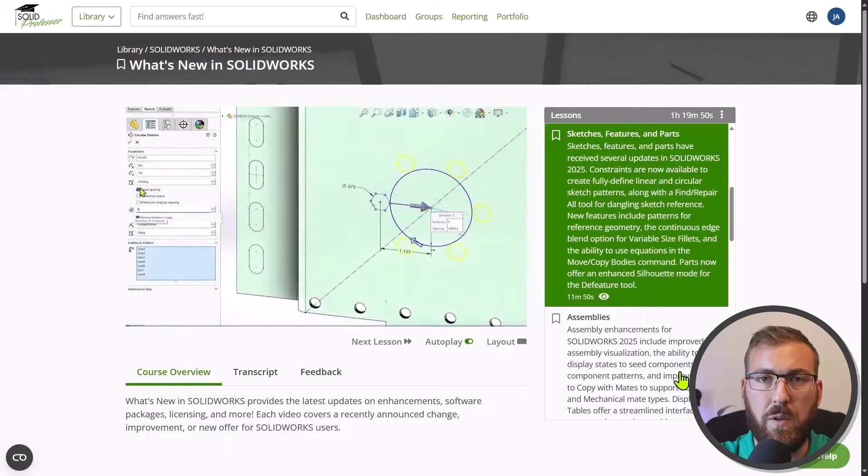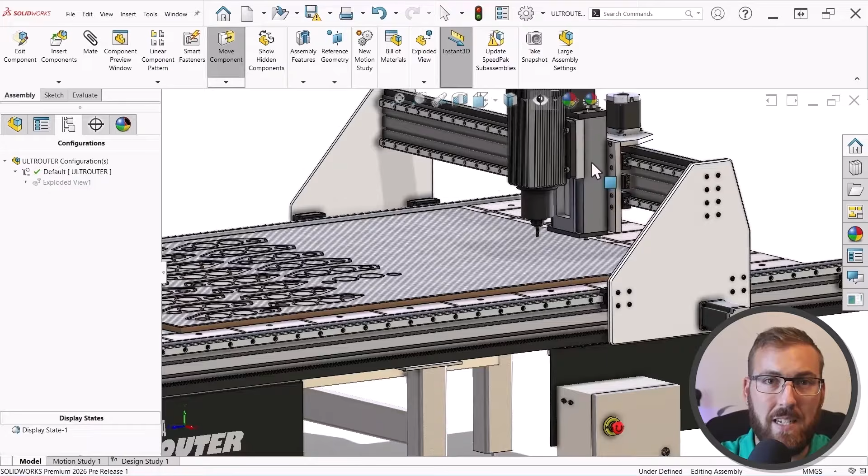Lastly, I'd like to offer a quick shout out to my friend and colleague Ryan Navarro, who designed the router assembly we'll be using to show off these capabilities. It's got over 400 components, a fully articulating gantry and spindle, and some pretty impressive details. Alright, with that out of the way, let's take a look at number 1 on the list.

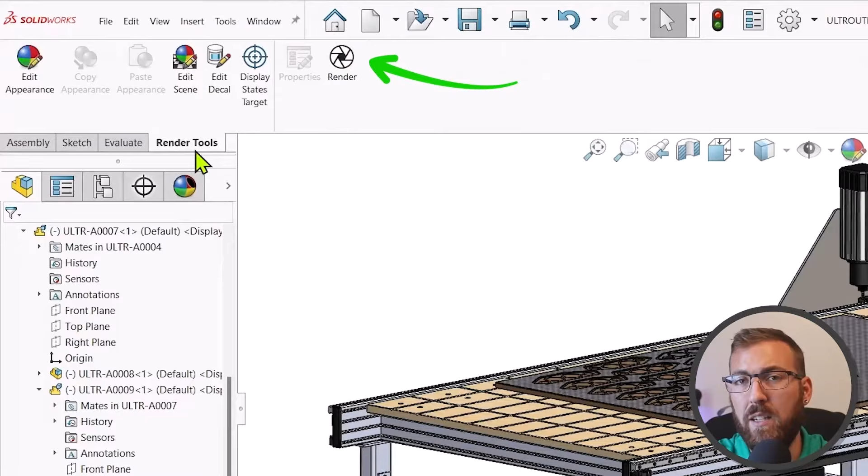PhotoView 360 was retired back in 2024, but SolidWorks 2026 now offers a somewhat similar replacement. If you have Visualize installed and licensed, you can enable the add-in, go to the Render Tools tab, and click Render to create a photorealistic image directly from the graphics area. Set file name, format, size, and a quality preset, and click OK. Rendering uses the Visualize offline renderer, so speed and quality will depend on settings and hardware.

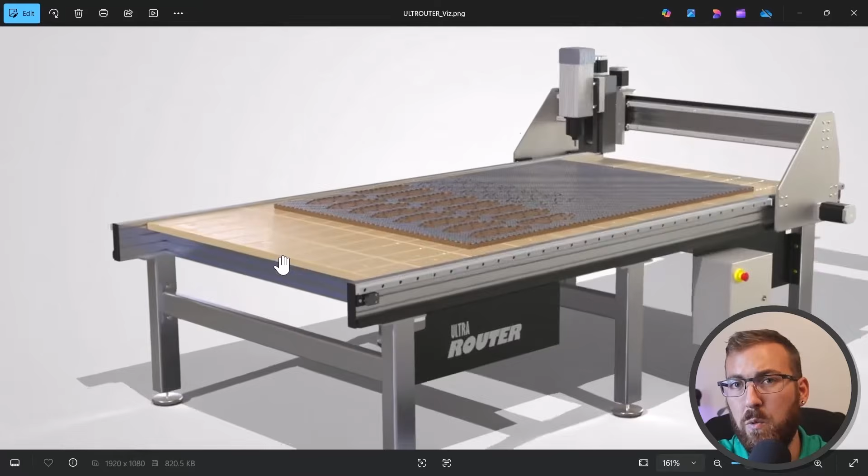The new DSPBR appearance library also helps with this, providing predictable lighting and textures. As a heads up, you may need to customize the Render Tools tab to add the render command. It's not here by default in PR1.

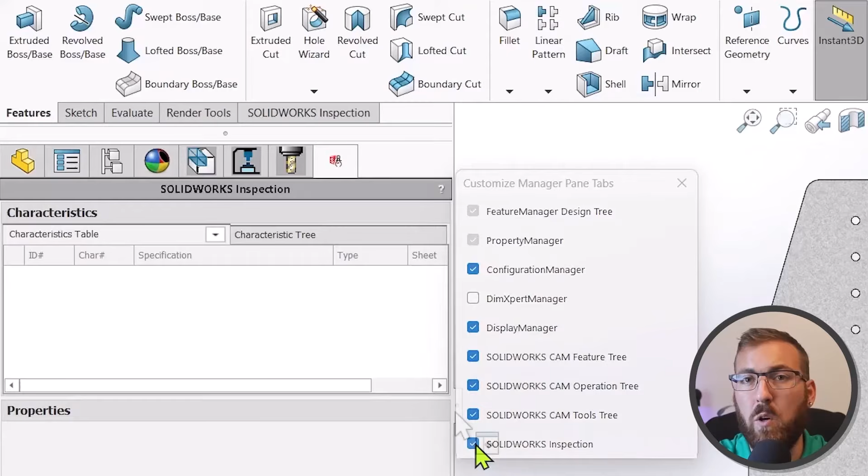This is a relatively small UI tweak, but it makes everything feel so much better that we had to include it. You can now right-click any of the Manager pane tabs, choose Customize, and hide what you don't use. When collapsed, you can click the ellipses icon that appears for quick access to active tabs. This is so much cleaner than previous years where you had to use those tiny arrow icons to navigate through the tabs. This enhancement is especially useful if you run add-ins like CAM, which result in several of these tabs.

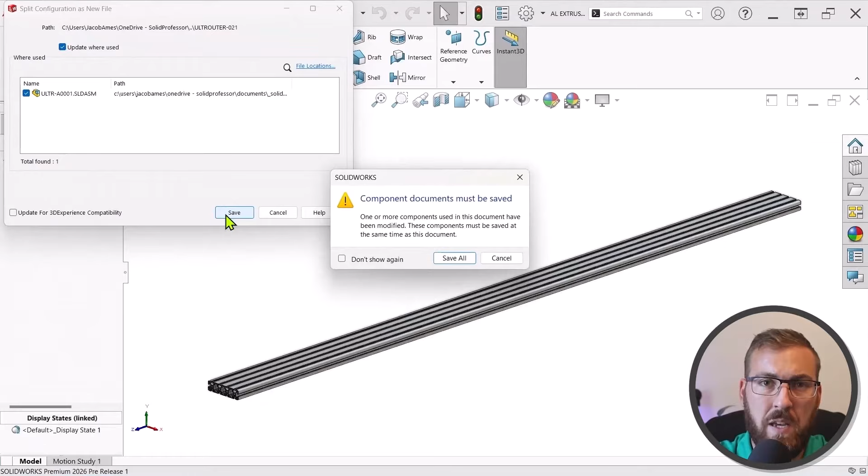The new Split Configurations command lets you save every configuration to its own file in a single operation, and provides an Update Where Used option to automatically remap references in assemblies if you prefer. This replaces the old school Save As strategy, which required you to repeatedly save the same file over and over and delete the unnecessary configurations. And it essentially automates repeated use of the Save Configurations command that was introduced in 2020, while allowing you to get ahead of any potential file reference issues.

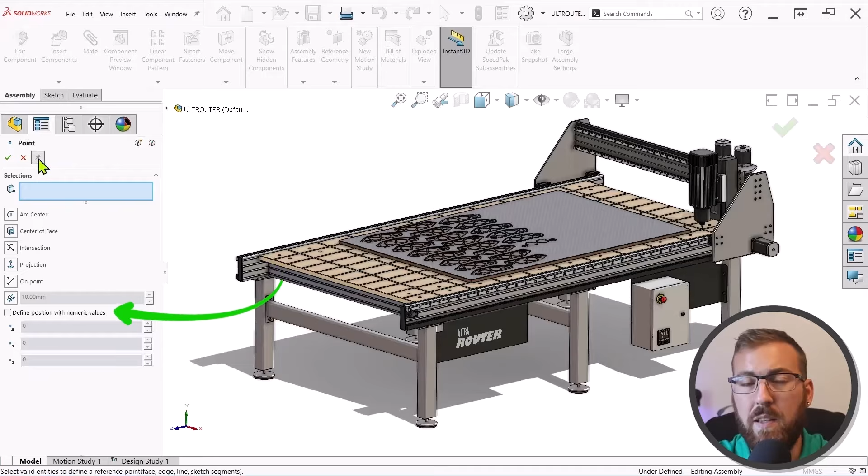You can now define reference points directly with numeric XYZ values in parts and assemblies, which is excellent for any workflow requiring the use of known coordinates. This is now a super fast process, and it's great for locating features, positioning components, or representing known positions. This replaces the legacy approach of defining a sketch point with multiple dimensions in a 3D sketch and converting it to a reference point.

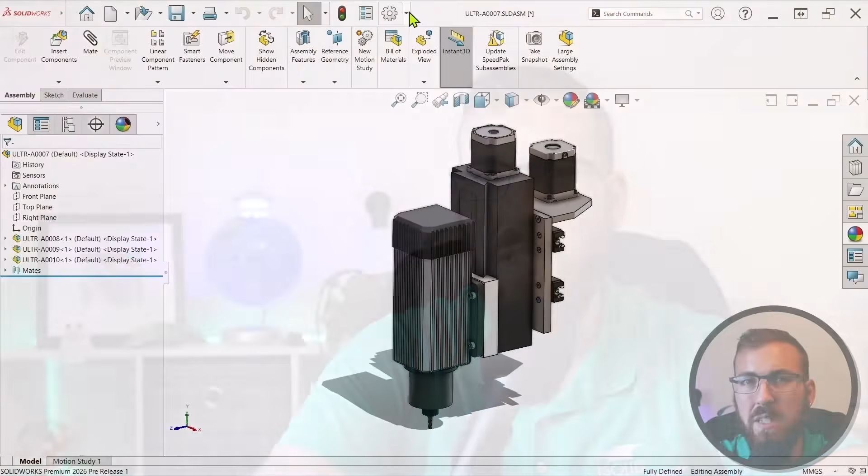A new performance option controls whether assemblies are marked for rebuild when cosmetic changes occur in referenced components. The default Always option will behave just like previous releases, but setting this option to Never will not require parts or assemblies to be rebuilt so long as the changes are only cosmetic.

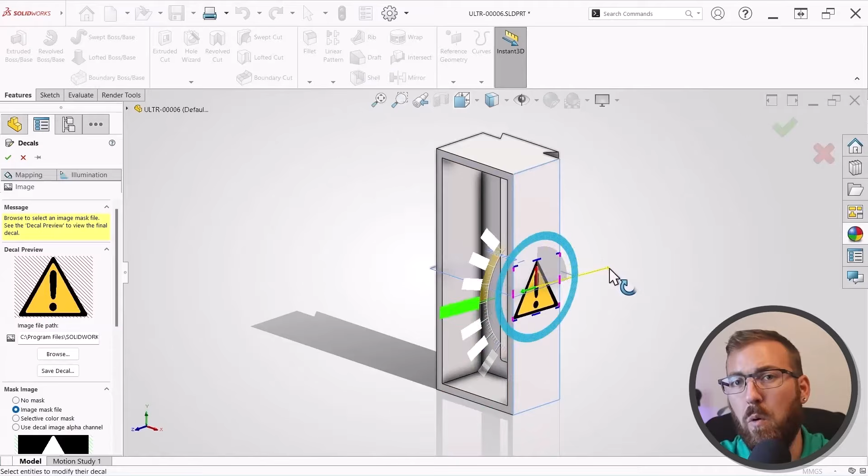Cosmetic changes include adding, modifying, hiding, or deleting reference geometry, appearances, decals, or non-driving sketches, along with hiding and showing bodies, or canceling feature changes before confirming them. In 2026, you'll see a bracketed asterisk in the file name for cosmetic-only changes, and the rebuild icon will not appear in the feature tree. This can be extremely useful for large assembly performance.

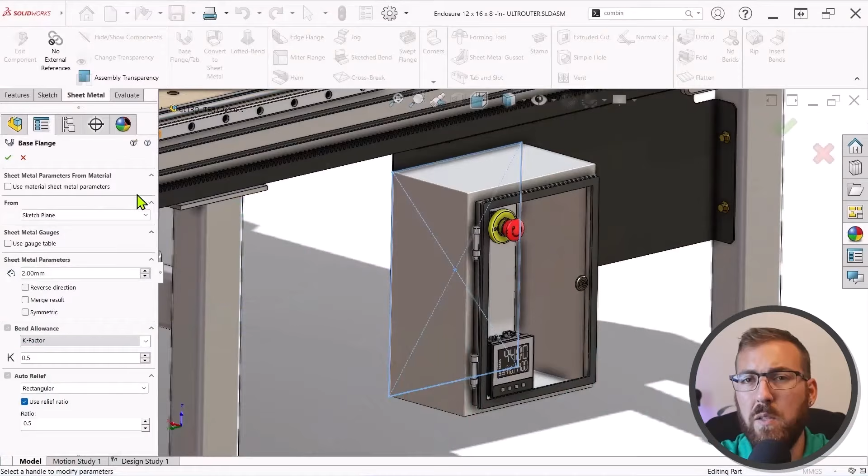Sheet metal base flanges can now start from a vertex, a surface face plane, or an offset. This is especially useful for multi-body and master modeling workflows where existing geometry is commonly reused to establish intelligent design intent. You can now create sheet metal bodies in the proper position without requiring extra planes or converted sketch geometry, which can make it difficult to keep things organized.

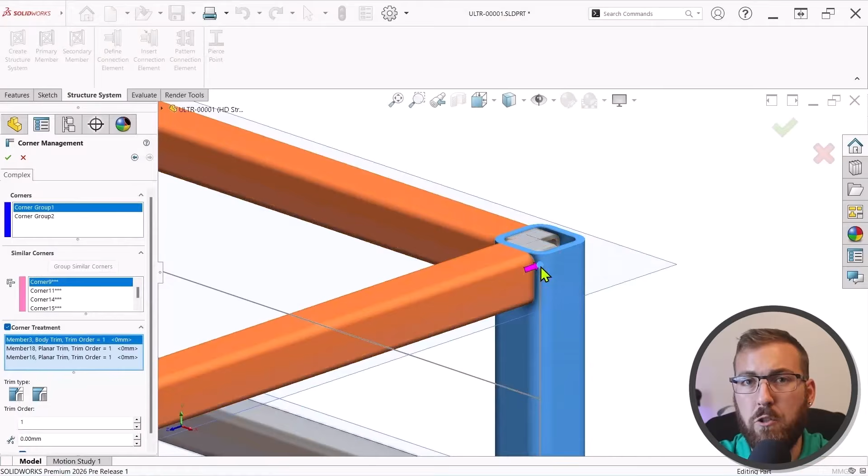Complex intersections of 3 or more members are now significantly easier to deal with in structure system designs. Instead of adjusting trim orders per member by modifying a numeric value, graphical combinations are illustrated and presented on screen for you to choose from. You can browse through the available options and click them to preview the result, and whichever corner treatment you choose will propagate to similar corners automatically, saving tons of time.

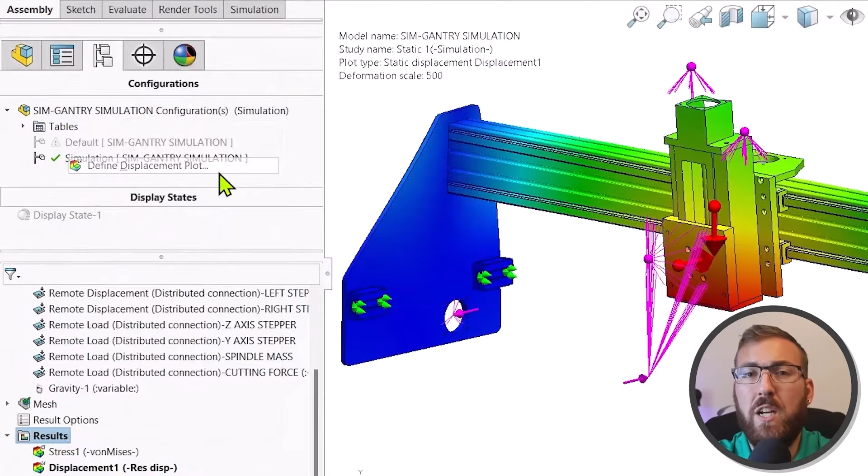Static simulation studies now support angular rotation in displacement plots, allowing you to view displacement in degrees with respect to an axis of your choosing. This makes assessing values like torsional stiffness very straightforward, whereas previous years offered only translational displacement values from which characteristics related to torsion and twist had to be inferred. Just choose angular rotation in the displacement plot, pick your units and a rotational reference axis, and you're good to go.

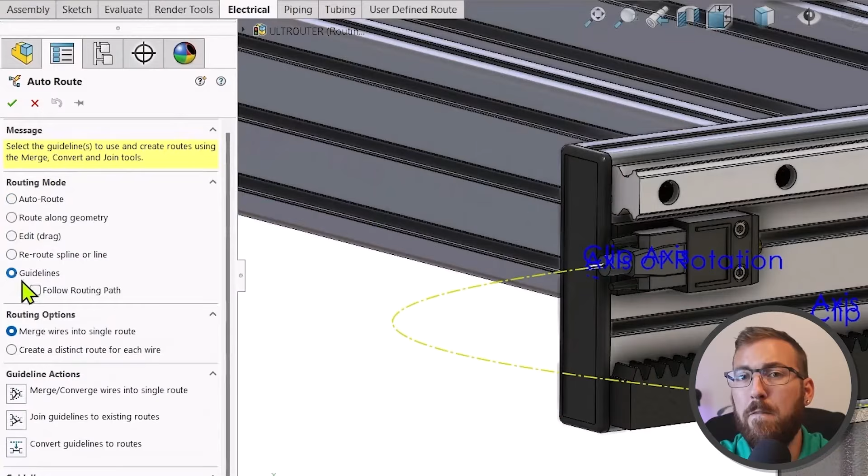In electrical routing, the auto route command now includes an option called follow routing path when guidelines are used. When enabled, this allows you to select a predefined 2D or 3D sketch, which essentially acts like a bounding curve for the guidelines, which will try to trace that path. Previously, guidelines would simply take the path of least resistance, and typically required significant manual modification to properly position. Now you can expect faster, more predictable routes when working with guidelines.

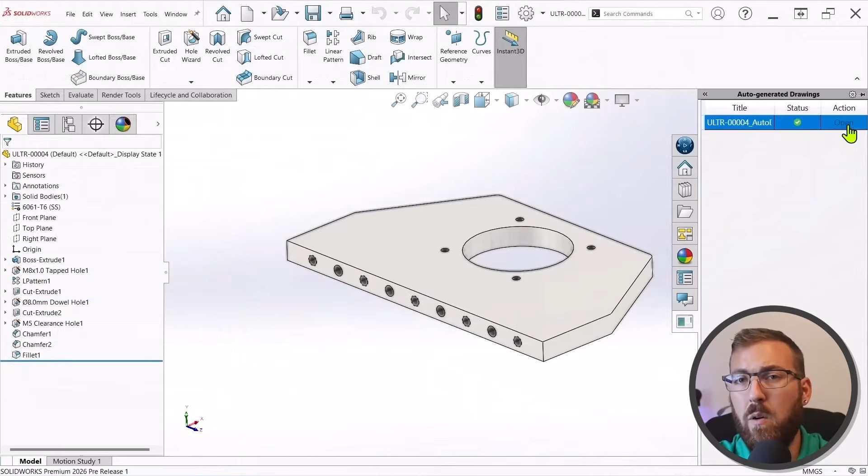Rounding out our top 10 for SolidWorks 2026, the auto-generate drawing command now includes the ability to create section views and hole callouts, which were previously unavailable. With the 3D Experience add-in enabled and logged in, use the File drop-down to access auto-generate drawing, choose a file name and location, and confirm. The results may require a bit of cleanup, but result in some pretty comprehensive drawings that can save a lot of design time. This capability was originally introduced in SolidWorks 2025 SP1 and has been under development ever since. So if you haven't heard of this improvement until now, that's probably why.

Before we wrap up, let's briefly talk about SolidWorks' new enhancement policy and the 2025 enhancements you may have missed. In years past, SolidWorks would introduce all enhancements one time per year with each major yearly release. But beginning around 2023, they began introducing more and more enhancements throughout the year as part of service packs or SPs. This was especially true in 2025, where dozens of enhancements were added throughout the course of the following year, including auto-generate drawings. It's very important to note that SolidWorks 2026 includes all of the service pack enhancements that were released for 2025 over the last year, but they won't be listed in the What's New documentation for 2026 since they technically came out in 2025.

So if you didn't update to one of the later service packs last year, or if you're coming from an earlier version like SolidWorks 2024, you likely missed these features. All that being said, be sure to check out What's New in SolidWorks 2025 in addition to SolidWorks 2026 so you don't overlook powerful new capabilities. And additionally, watch out for service packs containing new enhancements throughout 2026.